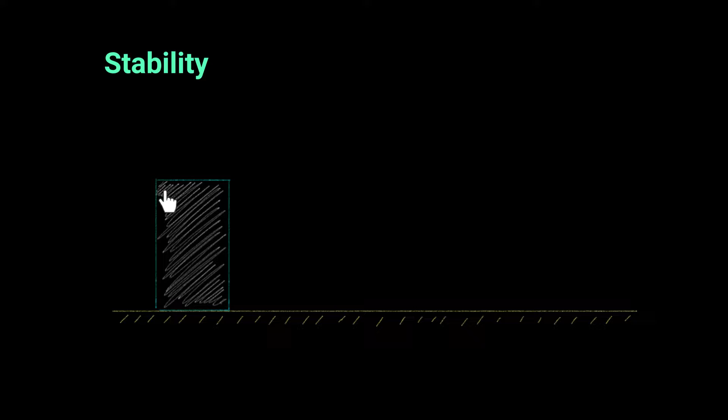So why are some things easy to fall and other things harder to fall, right? And let's take a look. Let's say we have a block, and the idea behind this block is it's completely uniform in density, which means that it's not like all the weight is over here somewhere at the bottom and it's all hollow from the top. It's one uniform solid block, right? And for that, the mass is acting directly on its exact center.

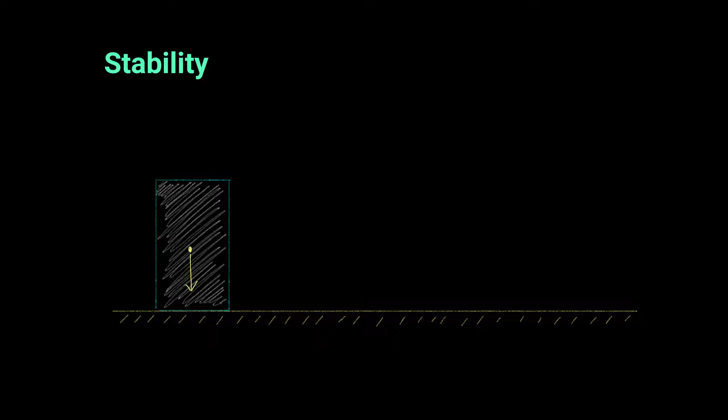So the weight is approximated to work around the center. So the weight is W. And let's say we're trying to flip it over towards the right. So let's say I try to push it kind of like this. I try to turn it like that. Now you appreciate what I'm causing. And let's get a pivot over here.

So for this frame of reference, because it's going to turn towards the right, this point won't really move, but it'll try to kind of fall around it. So this is the turning point, so it's acting as a pivot, right? So I'll mark that. And the blue force pushed by me is causing a clockwise moment. And as soon as I lift it, the weight will try to push it down and make it fall counterclockwise, right?

So these two are fighting each other. So you can appreciate the heavier this is, the harder for me to tip it over, and that makes perfect sense. But let me ask you this: at what angle or at what position will it completely tip over? And you've probably played with this. You try to push something. You try to bend it.

Another thing I want to highlight is it's easier to tip something over from the top rather than from the bottom, because you generate a larger moment the further you are from the pivot. Look, if I try to do it at the top, it's easier to tip over.

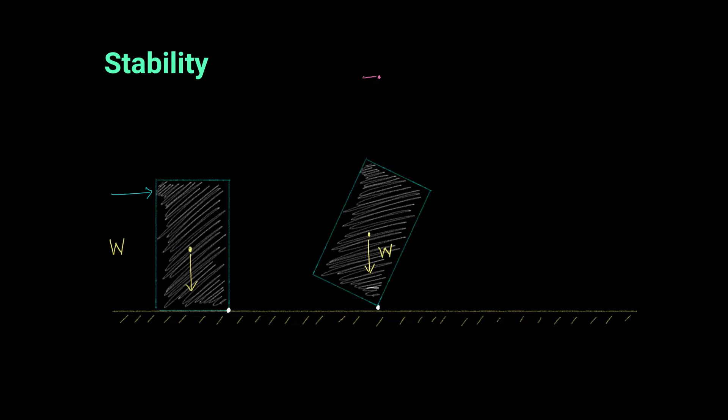So if I draw a line over here, we still appreciate that the force is not directly on the pivot, but slightly towards the left. So the distance is kind of this much, and the weight acting on it is downwards. So if I draw a similar example, the pivot is over here, a very small lever is over here, and the weight W is acting on it. Now, the moment generated over here will be counterclockwise, because it's obvious to see why, right?

And this block won't tip over. It'll fall back and be stationary, standing again, because as soon as you let go, the net moments will dictate where it will go. Now for it to fall over, the weight or the center of mass must cross the pivot and cause a moment on that side.

We're saying counterclockwise and clockwise according to our frame of reference, but you understand that it's either this way or that way, right? And let's get a third example in, an example where it will actually tip over, hopefully, inshallah.

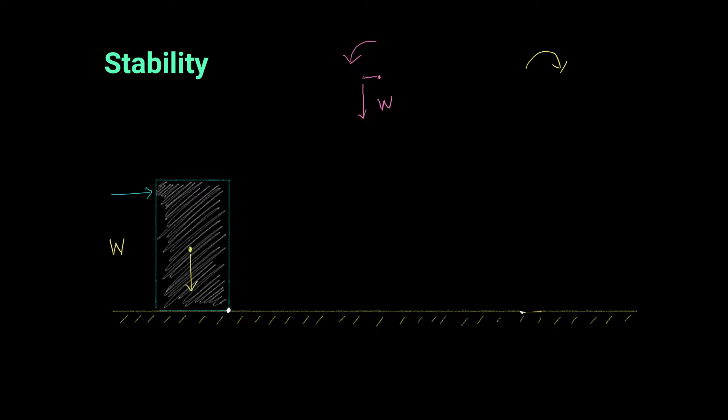Now here's my question: how can I design something that's way more stable than this block over here? Well, the first thing you can do is erase everything on the screen. Let's see if we can get that close enough. If I want this block to be very stable, what can I do? Well, if this block had a much larger base, it would be much more stable.

Let's say I extend it by a bit and attach some triangular wedges to it, kind of like that. And the bigger this is, the harder it is for me to tip over. The center of mass will change because of this added mass, but let's assume it doesn't change by too much. It's a very small piece I attached here, and this is now a part of it.

And if I try to tip it over, the pivot won't be over here, it'll be over here. So by increasing the base, you've moved the pivot, and when you try to rotate it, this has to go all the way over till here. Now you appreciate that it'll be much harder to tip over because you've moved the pivot way further, and you'll have to do a lot more work to cross that pivot line. So increasing the base will increase the stability of an object. That's one major way, right?

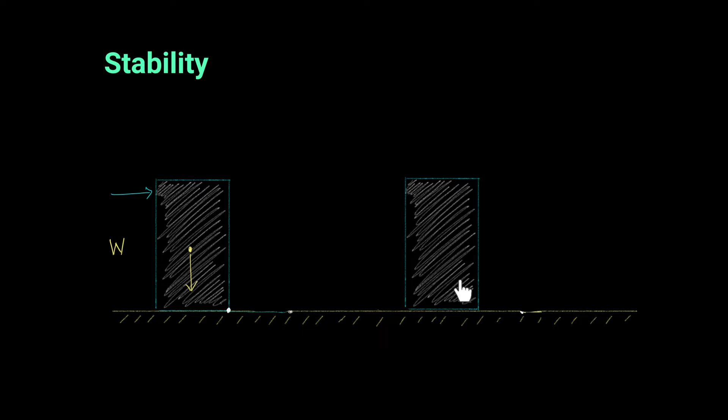Another way, let's erase this, clean as possible. Okay, another way is if I have the same box and I make sure that the bottom part is much heavier. So it's the same block, but let's say the bottom half is made of lead, which is way heavier, and the top half is still solid, but aluminum, right? So it looks the same as this, and I've made sure the weight for both of them is the same, but the bottom side is much heavier.

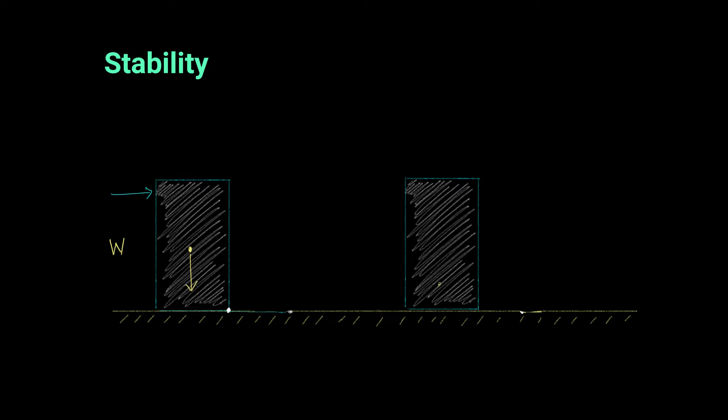So the center of mass for this object is now acting way at the bottom. Why am I using a pencil? Way at the bottom, right? Same weight, but it's way at the bottom. And now you realize that once I try to tip it over again, push it from here, this has to cross a lot more distance to cross the pivot line, and it'll automatically be more stable.

So in a nutshell, either increase the base so it's difficult to cross the line, or have more weight at the bottom of something, so again it's more difficult to cross the imaginary pivot line. So that's how you increase stability of an object and prevent it from tipping over.

One more thing I'd like to add: have you seen those flip the bottle challenges? There's always very little water over here. Now the trick isn't to do it with the right angle or anything. The trick is only to do it slow enough when you're flipping that bottle, because the water is all at the bottom, and the bottle itself is very light, so the water's carrying all the weight. You make sure the water, once it touches down, is right at the bottom.

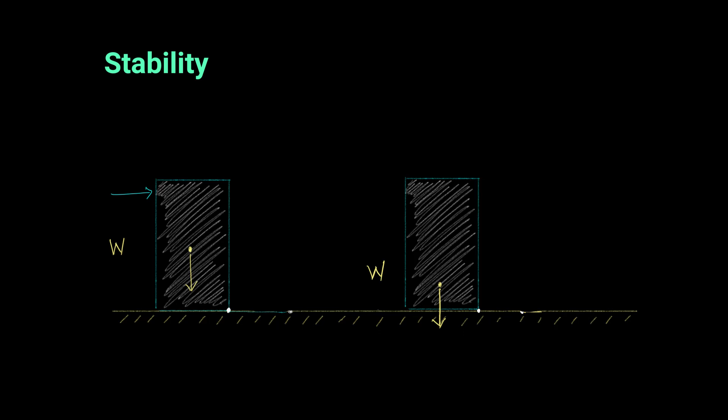So let's say this is a bottle and it hits the floor. You try to make sure it first hits the base, but it has that inertia, that momentum. It's about to fall over, but all that water's weight will try to prevent it from moving. So if you have a little bit of water at the bottom and it falls flat like this, and the water is not bouncing around too much, and you do it slow enough, you'll win the bottle flipping challenge, because it's much easier to keep it stable like that.